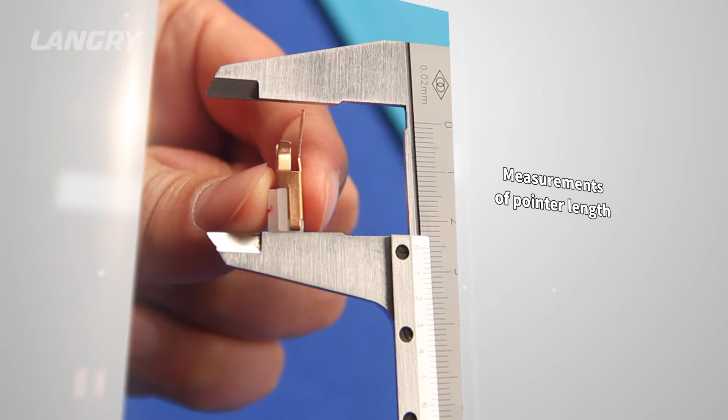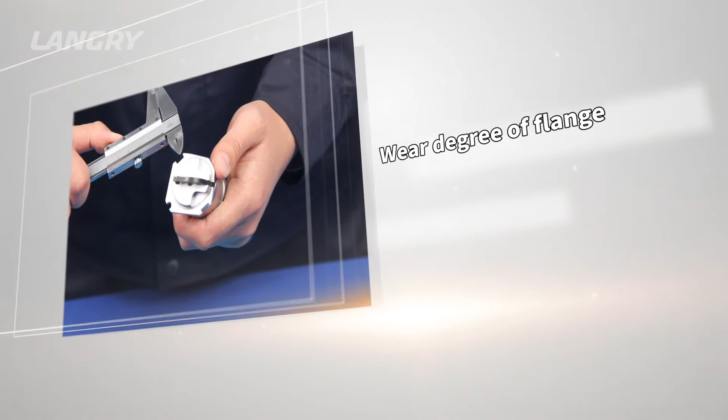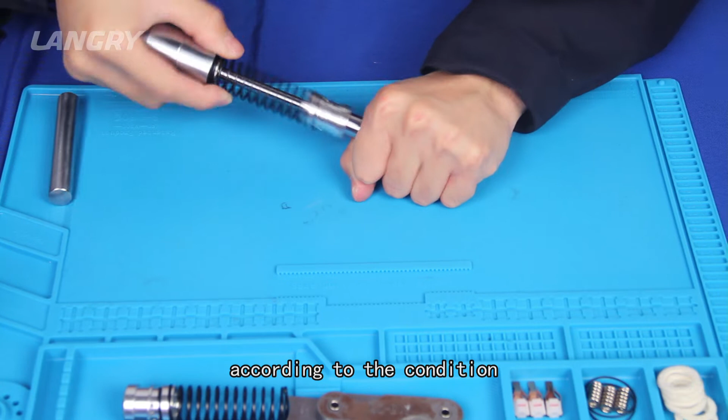Maintenance for rebound hammer parts mainly includes measurements of pointer length, pointer friction, separation point at 100, flare angle, wear degree of flange, and working length of tension spring, and inspection on service condition of buffer spring. Then debug or replace according to the condition whether it is qualified or not.

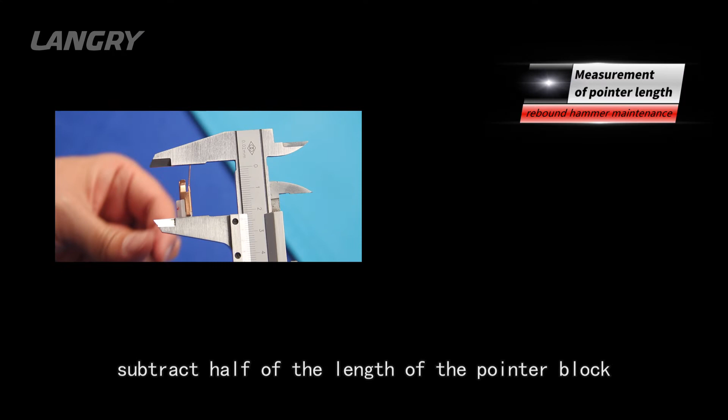1. Measurement of pointer length. Firstly, clamp the pointer with vernier caliper to measure the total length of horizontal projection. Secondly, subtract half of the length of the pointer block. Then get the pointer length. The pointer length should be 20 ± 0.2 mm.

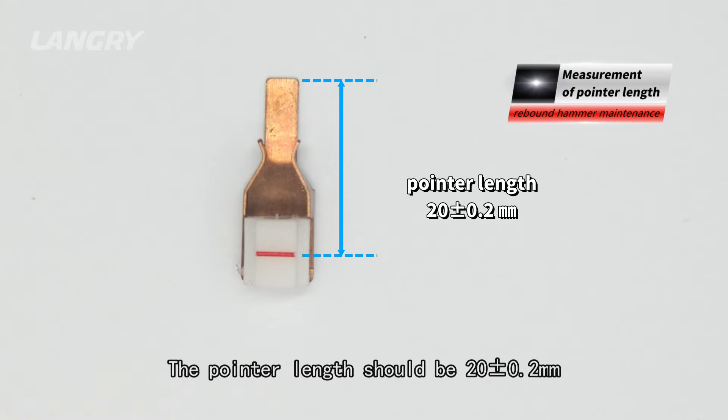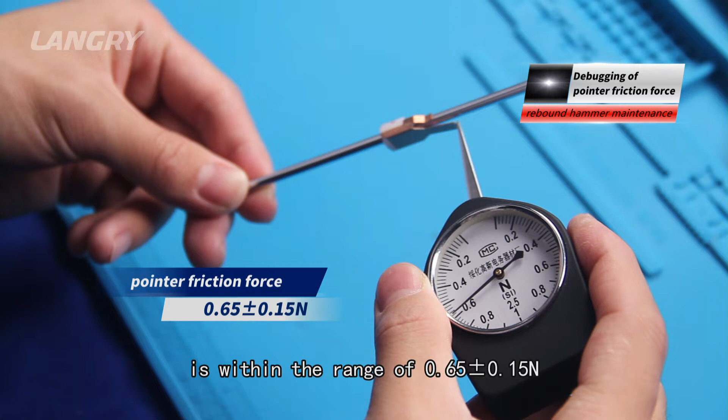2. Debugging of pointer friction force. After cleansing the pointer pivot, you can use the force meter to test the friction force. Note: the force meter should be perpendicular to the pointer pivot and move horizontally. The standard value of pointer friction force is within the range of 0.65 ± 0.15 Newton. If the force is out of this range, debug again.

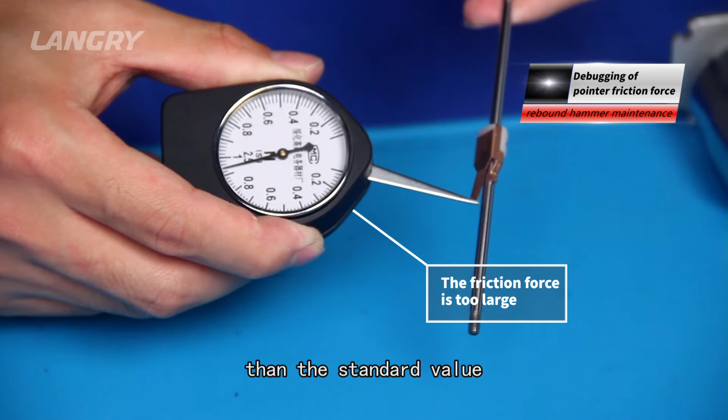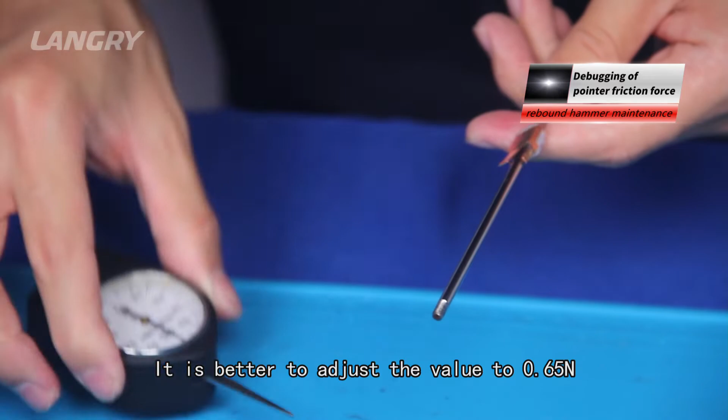When the friction force is greater than the standard value, separate the two opposite pointer pieces on the pointer pivot outward to reduce the friction force. It is better to adjust the value to 0.65 Newton. Note: please ensure symmetry on both sides and uniform friction force. When the friction force is less than the standard value, gently press the two pointer pieces inward by hand to increase the friction force.

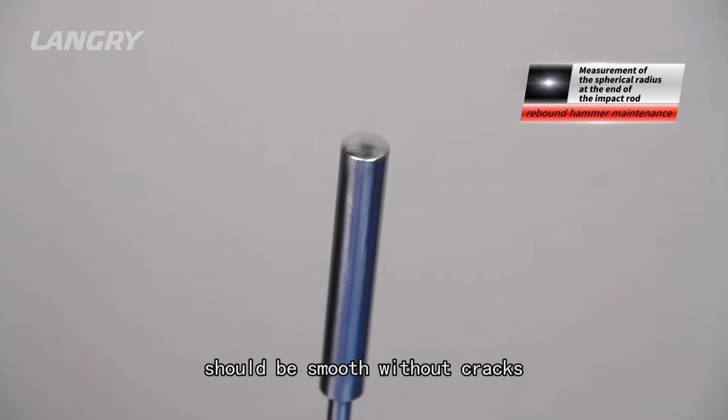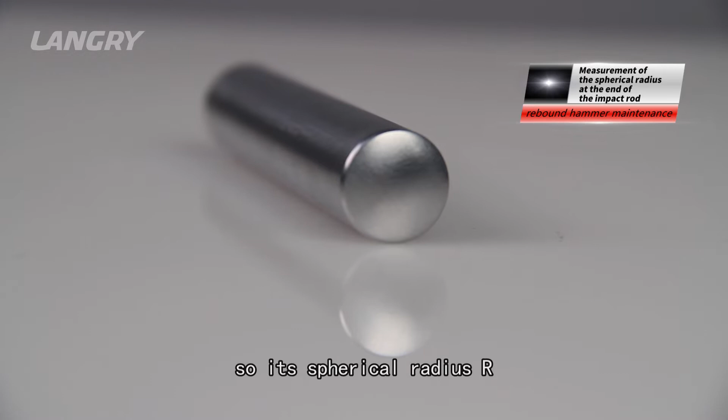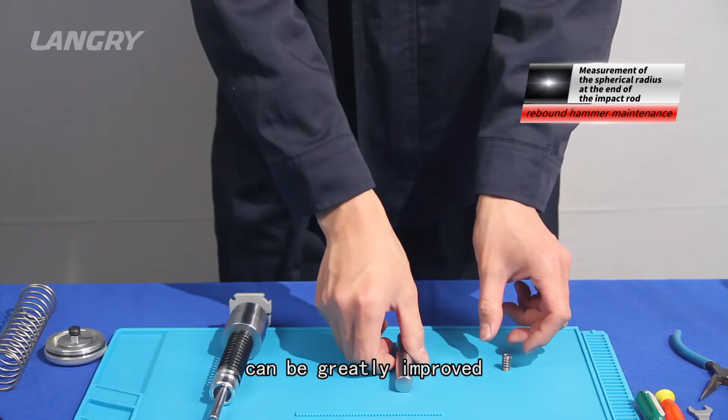The impact rod of Langry concrete rebound hammer is produced according to lower deviation, so its spherical radius R is generally 24. In use, the spherical radius will become larger. Therefore, the service life of the impact rod can be greatly improved. When the service spherical radius R is greater than 26, replace a new impact rod.

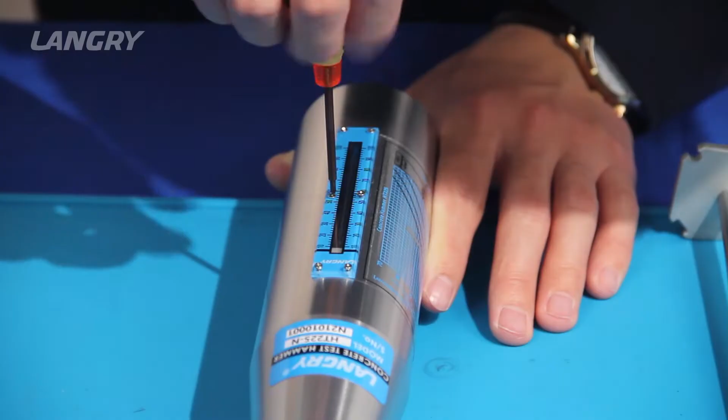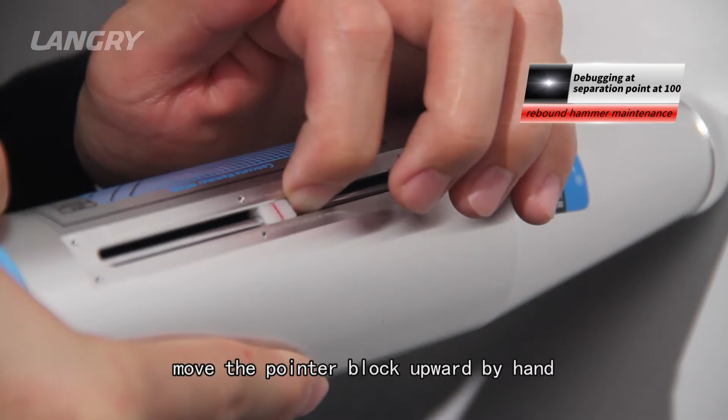4. Debugging at separation point at 100. Step 1. Detection on separation point at 100. Before testing separation point, remove the scale and then press the rebound hammer vertically downward on the horizontal plane. When the exposed part of the impact rod is less than 1/3, stop and slowly move the pointer block upward by hand until at the scale of about 90 with a slight sound of buckling.

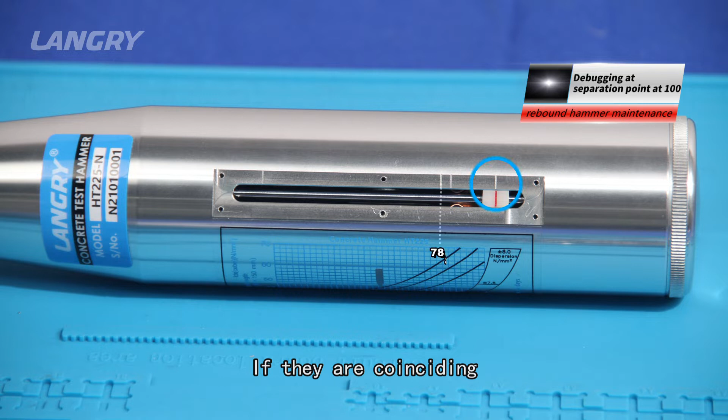Then slowly decompress the rebound hammer to let the impact rod slide downward slowly. Stop when the pointer block follows up and compress reversely until the rebound hammer hits. Next, lock the button and visually check whether the red line of pointer coincides with a tick mark of 100. If they are coinciding, the separation point is qualified. If they are not coinciding, debugging is required.

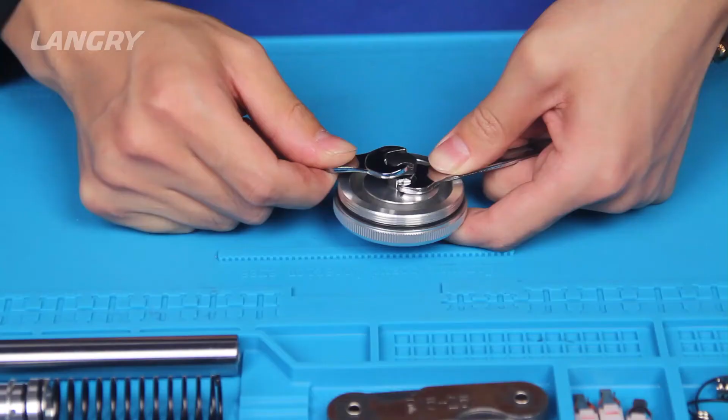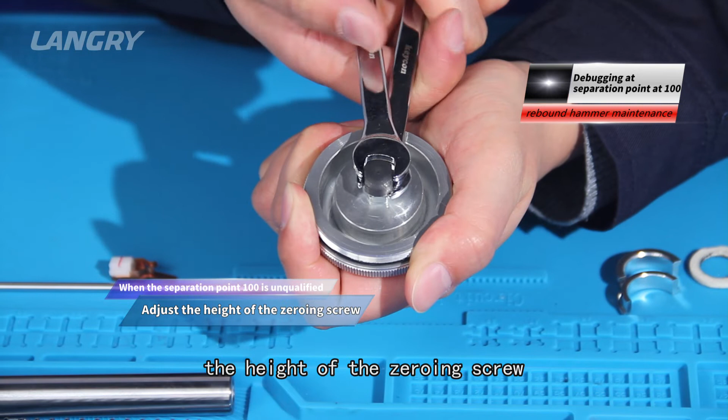Step 2. Adjust the zeroing screw. Note: do not adjust the separation point to influence the rebound value, and do not adjust the zeroing screw casually. Only when the separation point at 100 is unqualified, the height of the zeroing screw at the back cover can be adjusted to the normal separation point.

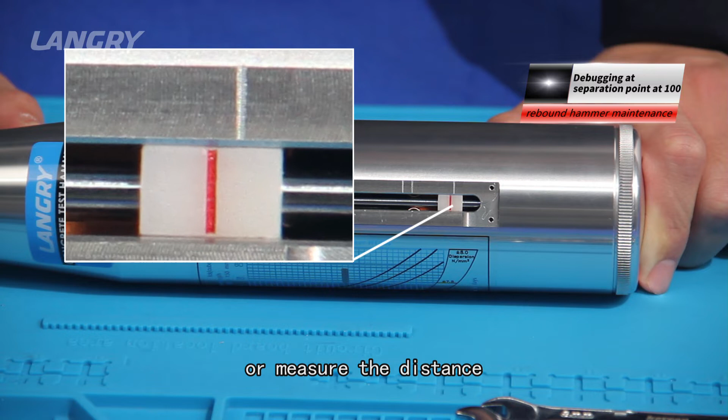Specific method: when the pointer is not at the tick mark 100, visually estimate or measure the distance between the red line of the pointer block and the tick mark 100 on the casing with vernier caliper. Then measure the distance between the vertex of the zeroing screw and the plane of back cover and record.

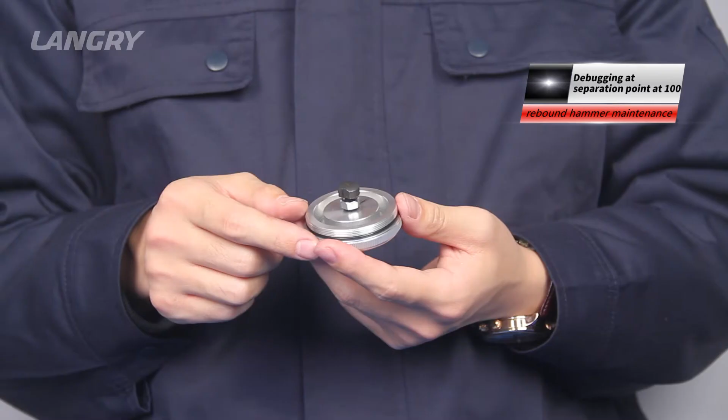Then use two wrenches, one fixed on the fastening nut and the other fixed on the zeroing screw, and screw in opposite directions to loosen the nut. When the pointer is lower than the tick mark 100, adjust the screw height clockwise by hand. When it is higher than the tick mark 100, adjust the screw height counterclockwise and lock the nut tightly.

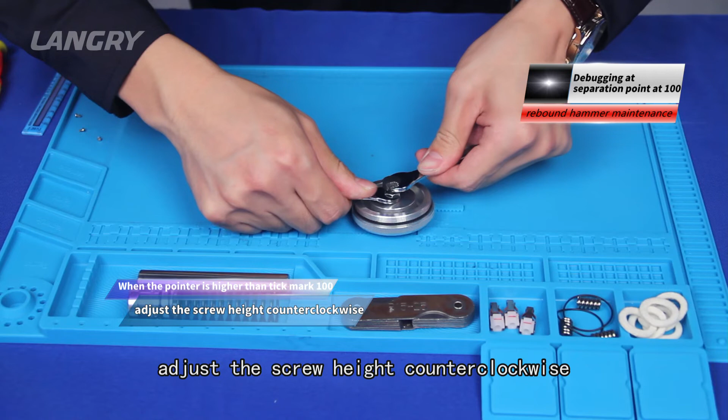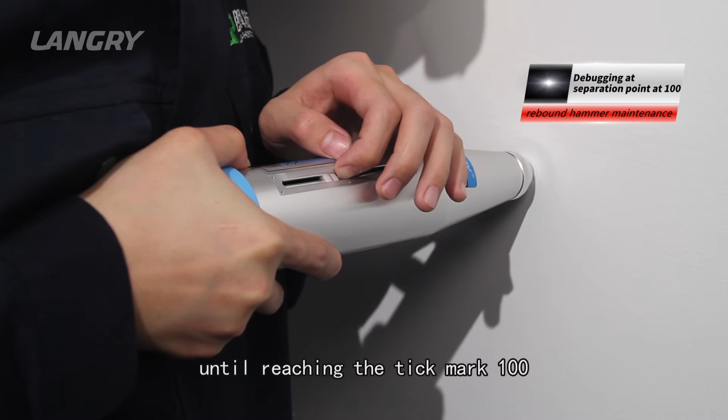Then measure whether the separation point is qualified. If unqualified, it will be adjusted again until reaching the tick mark 100. Note: the zeroing screw should be tightened after adjustment.

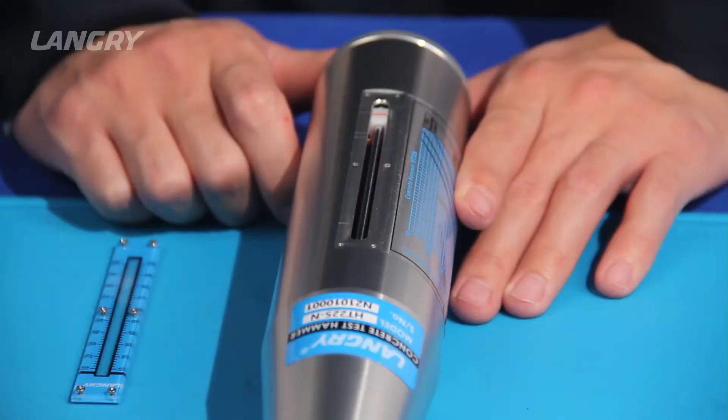Step 3. Install the graduating scale. Install the graduating scale on the corresponding position of the casing with the tick mark 100 facing backward. And then gently tighten 6 small screws.

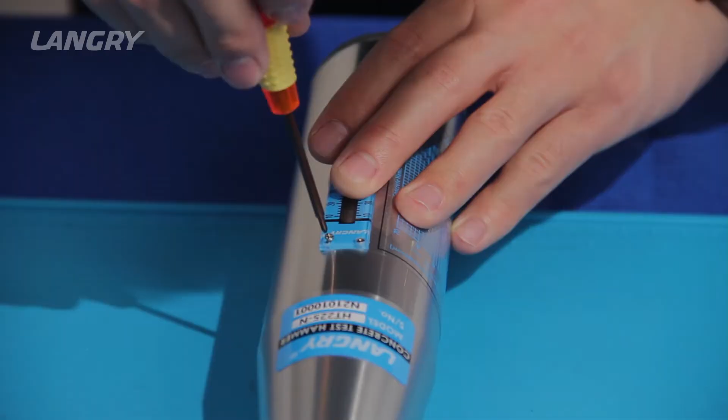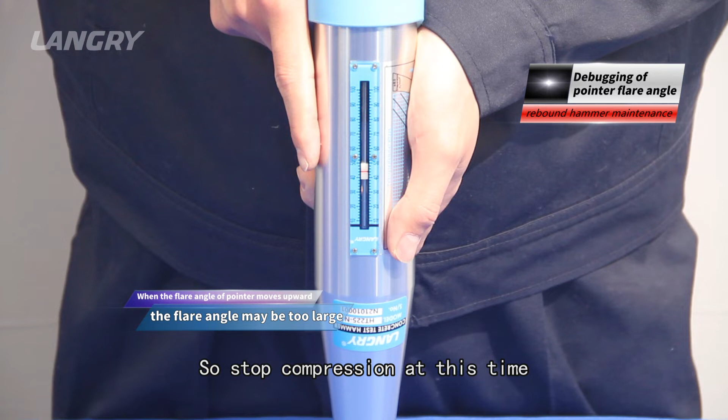5. Debugging of pointer flare angle. When the rebound hammer is compressed, the flare angle of the pointer piece may be too large if the pointer moves upwards. So, stop compression at this time to avoid damaging the pointer piece. The correct maintenance steps are as follows. When the flare angle is too large, it should be shrunk.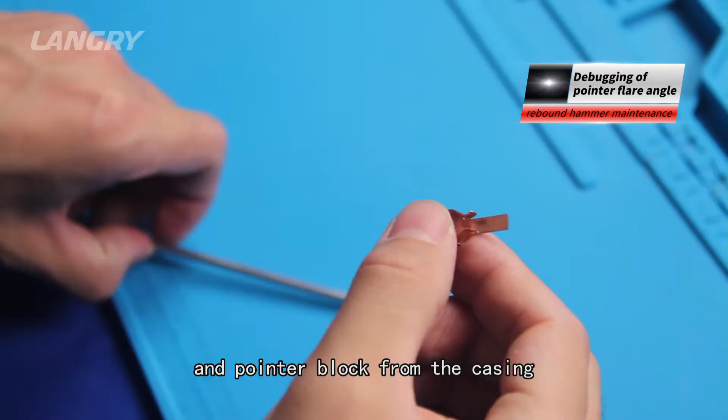First, remove the pointer pivot and pointer block from the casing. Then pass the pointer block through one end of the pointer pivot and press the pointer block toward the pointer pivot by hand to make the bevel angle slightly smaller. Next, measure the vertical distance, including the diameter of the pointer pivot, between the vertex of the pointer block and the pointer pivot with a caliper, and the distance should be about 6.5 millimeters.

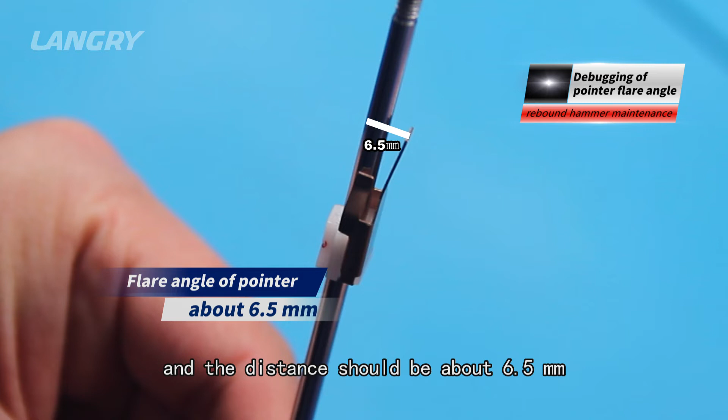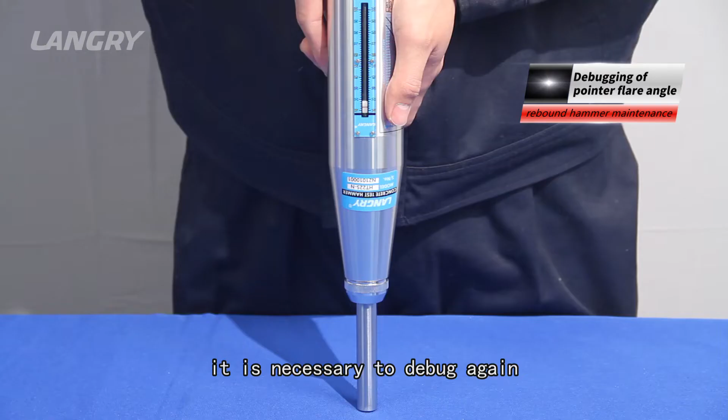Then assemble the rebound hammer and conduct a rebound test. If the flare angle is still unsatisfactory, it is necessary to debug again. If the pointer does not move or trembles after starting the rebound hammer, that may be due to a too small flare angle of the pointer piece.

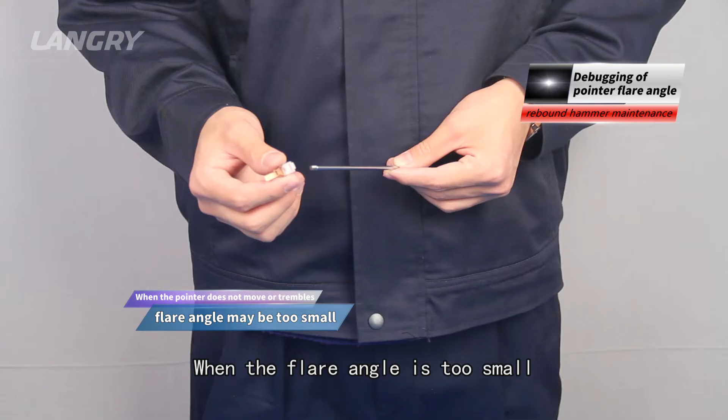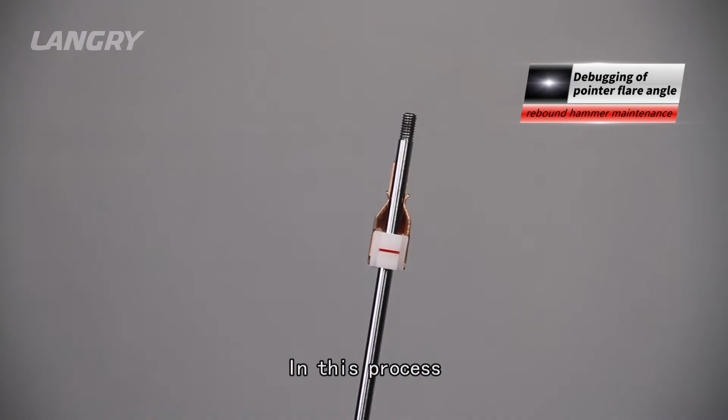When the flare angle is too small, it should be expanded. Gently separate the pointer piece outward from the bottom to slightly expand the bevel angle. In this process, ensure that the pointer piece is straight, because a bent and deformed pointer piece cannot be used again.

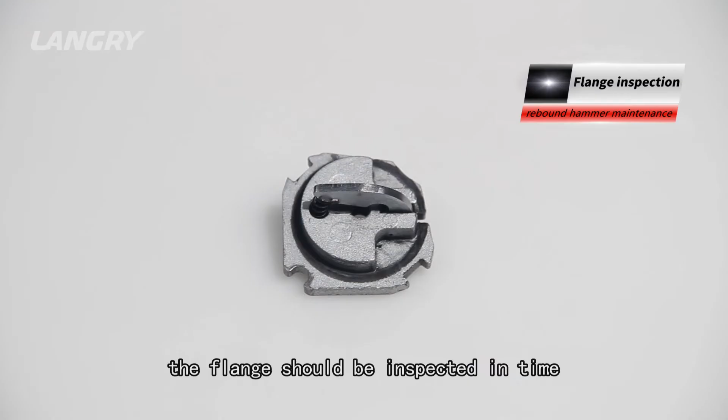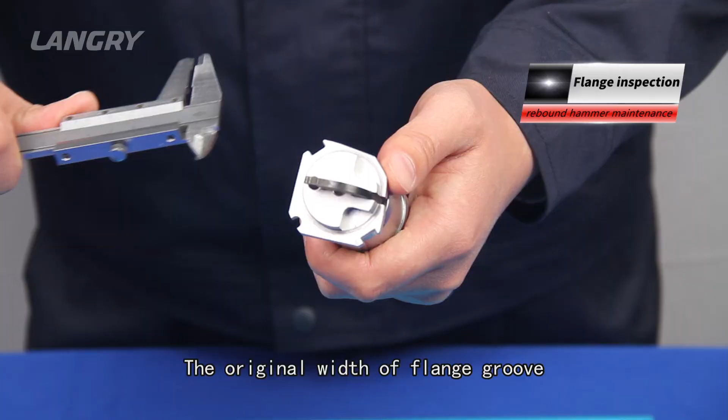6. Flange inspection. When the rebound value of the rebound hammer is unstable, the flange should be inspected in time. If the width of the flange groove becomes wider or the flange is seriously worn, the flange should be replaced with a new one. The original width of the flange groove is 6.3 millimeters, and the width after wear should not be greater than 6.5 millimeters.

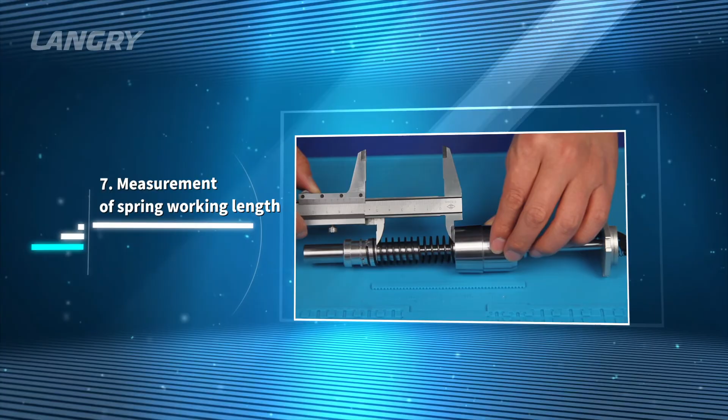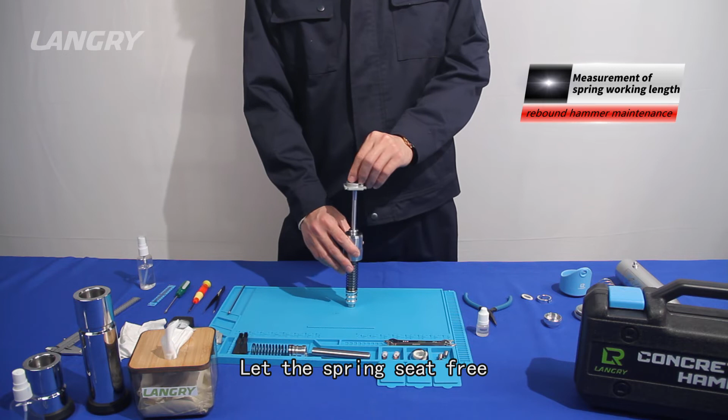7. Measurement of spring working length. When measuring the working length of the spring, you should take out the internals from the casing in advance and put them on the workbench naturally. Let the spring seat free and measure the distance between the spring end of the spring seat and the bottom spring plane of the impact hammer with the caliper jaw for external measurement.

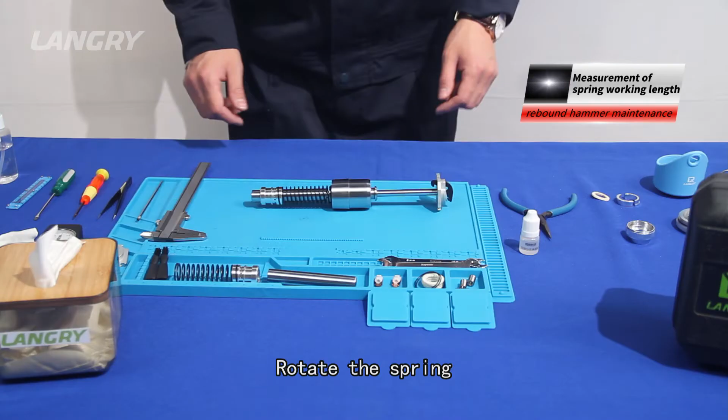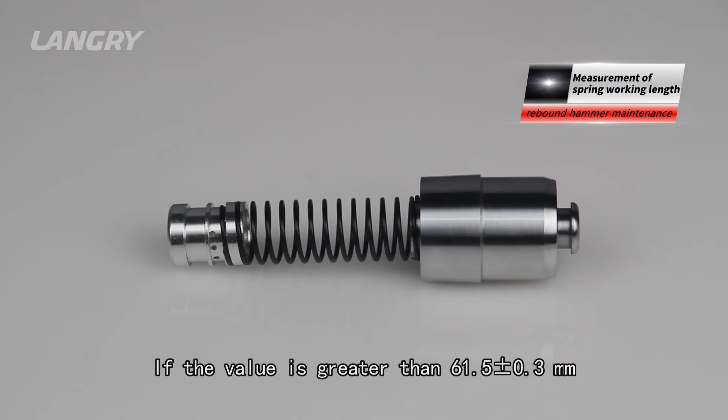Rotate the spring and measure in 3 angles. Finally, obtain the average length. The working length of the spring should be 61.5 plus minus 0.3 millimeters. If the value is greater than 61.5 plus minus 0.3 millimeters, adjust the hooking hole of the tension spring on the spring seat.

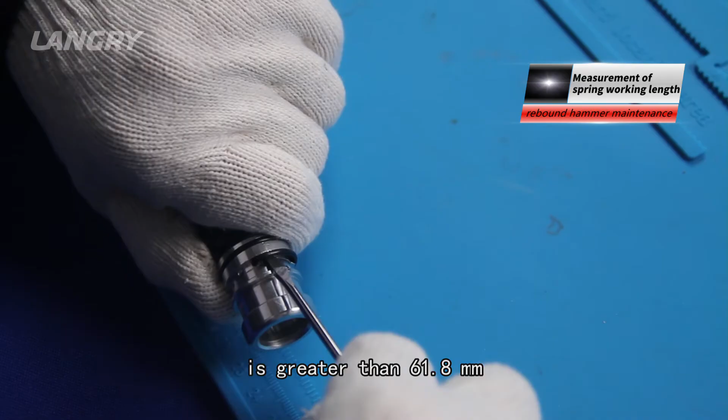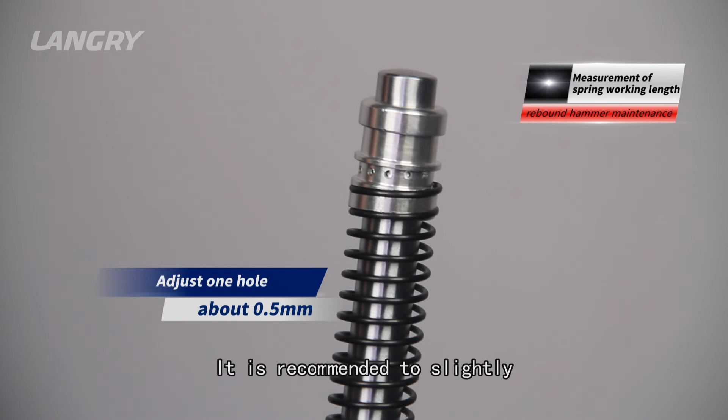Adjustment method. When the working length is greater than 61.8 millimeters, use a tool such as a slotted screwdriver to raise the spring on the spring seat, and retract the spring into an appropriate hole on the spring seat. During each hole adjustment, the length can be reduced by about 0.5 millimeters. It is recommended to slightly adjust 1 or 2 holes. After reinstallation, measure until it is satisfactory. If the spring is deformed seriously, replace the spring with a new one.

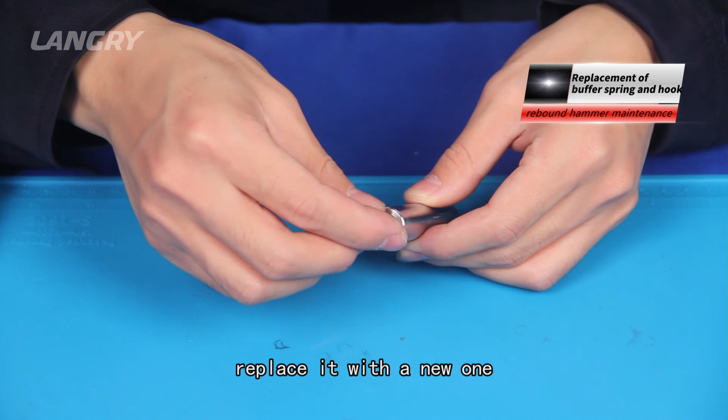8. Replacement of buffer spring and hook. When the buffer spring is broken, crushed, or seriously worn, replace it with a new one. When the hook is worn, replace it with a new one in time.

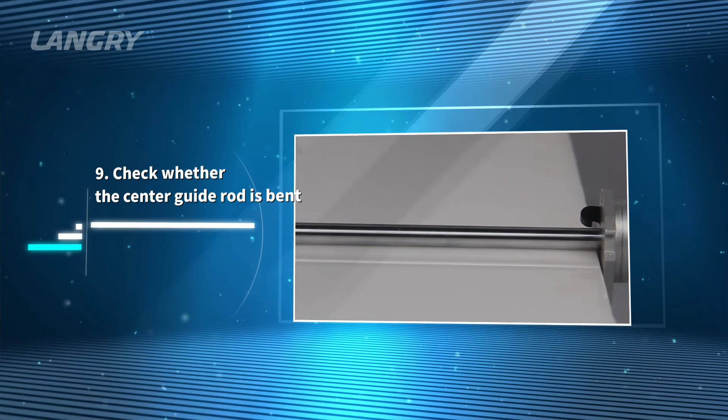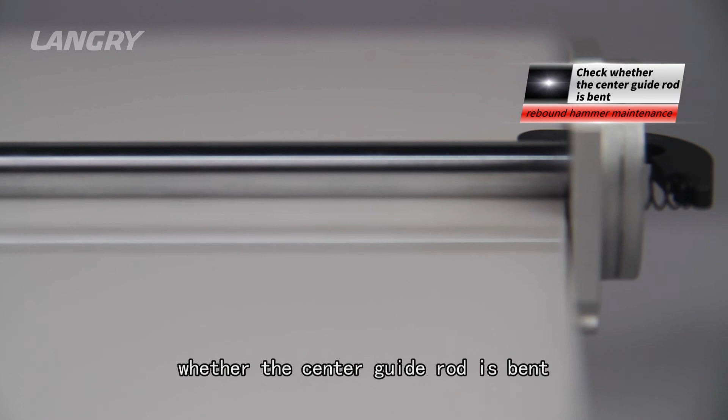9. Check whether the center guide rod is bent. Put the center guide rod on the platform or the glass, or lean it against the square, and visually check whether the center guide rod is bent. A bent guide rod will have a great impact on the rebound value.